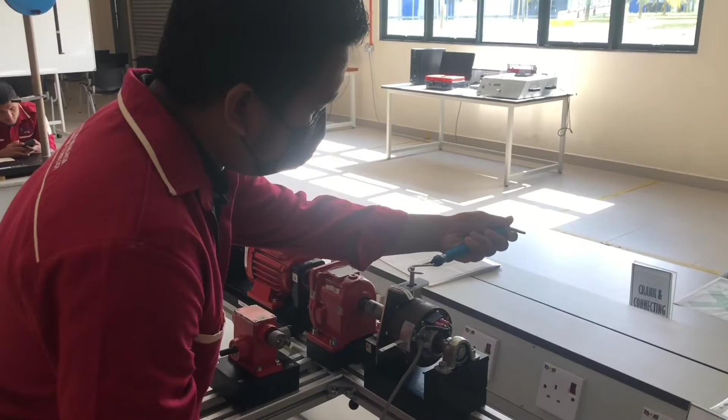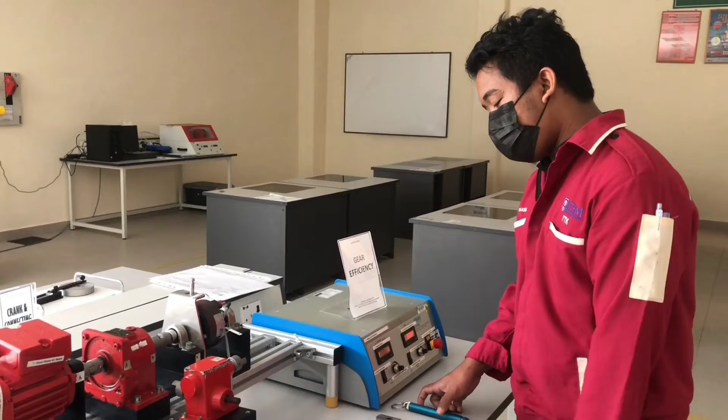Record the data in the table below. After we're done with the first task, we need to do the second task, which is to determine the efficiency of two-stage spur gear.

The setup will be the same as the first task. We need to set the motor speed and the excitation current. The motor speed is 1520 RPM and the current is 0.32. We need to set the speed first, 1520.

After that, we need to do the same thing as task 1, which is balance this motor using this lever arm.

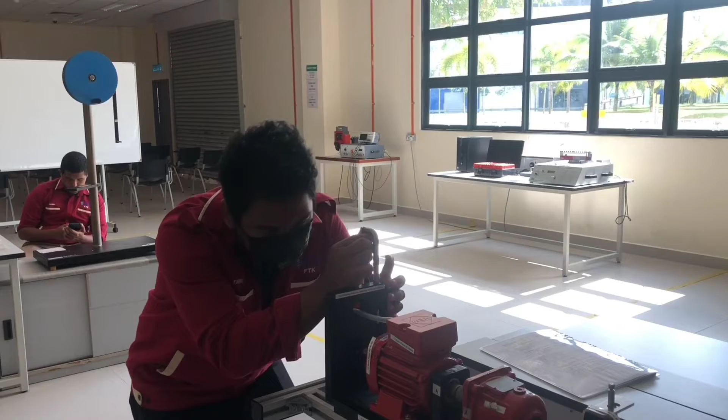Then we need to take this reading scale, which is 60.25, and then multiply with 25 Newton. That is for the force one.

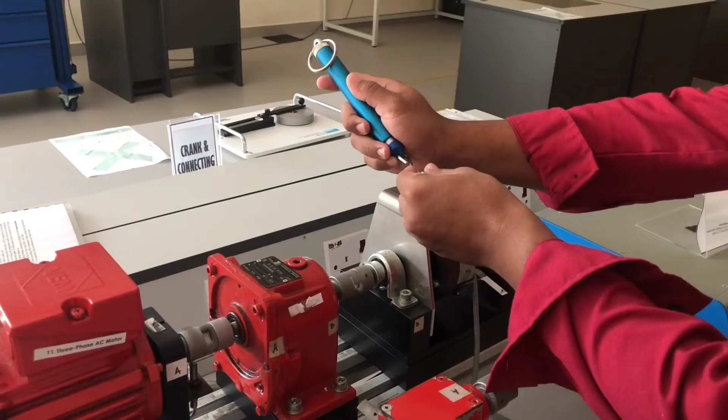We need to use this to take the second force value, which is force 2. We need to pull it and take the reading for the output force.

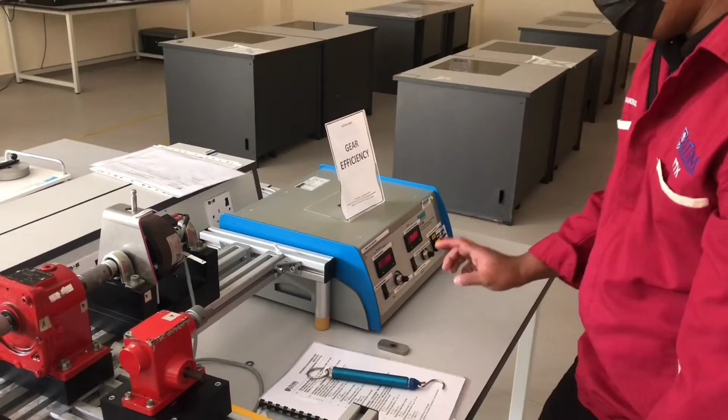After we're done with the experiment, we need to switch off all the current.

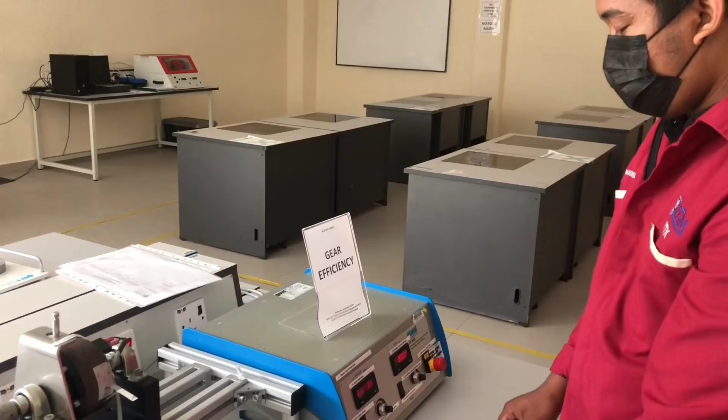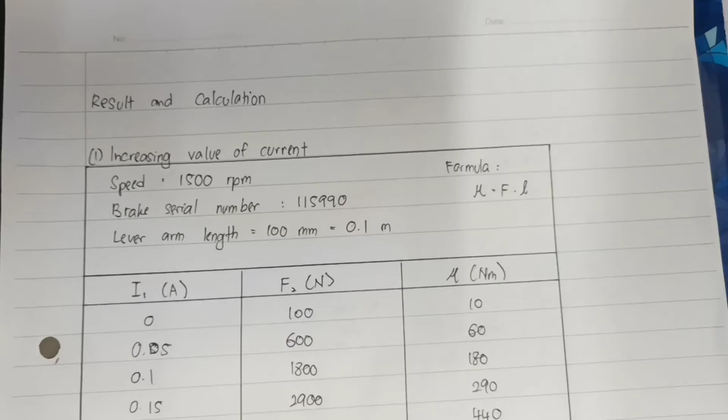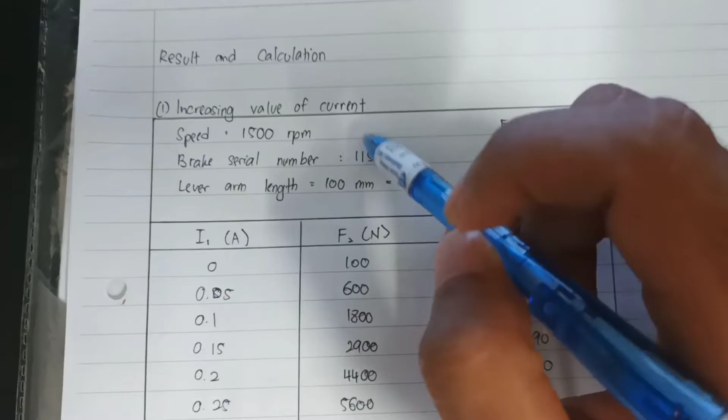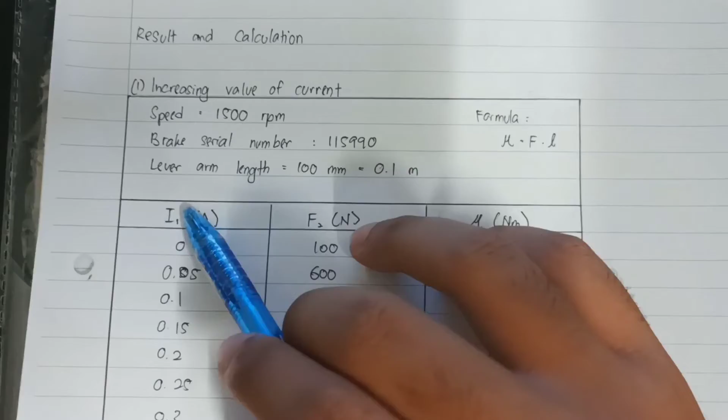For the result, we have two results: first the increasing value of current, and second the decreasing value of current. For the increasing value of current, we're going to use speed equal to 1500 RPM, brake serial number 115990, and lever arm length equal to 100 millimeter, equal to 0.1 meter.

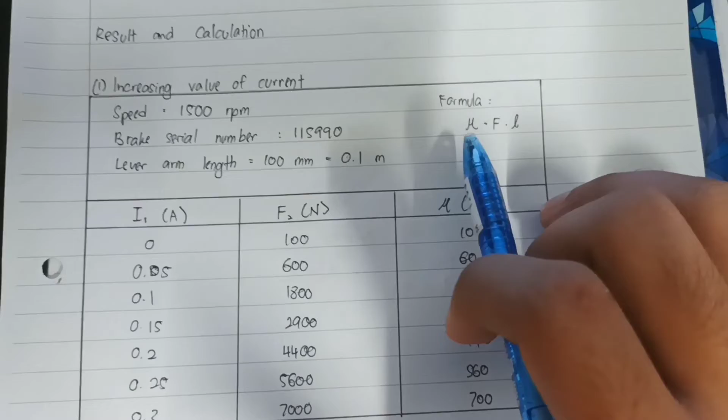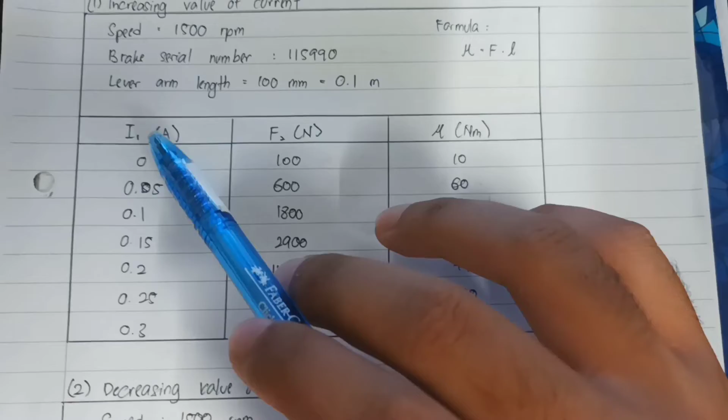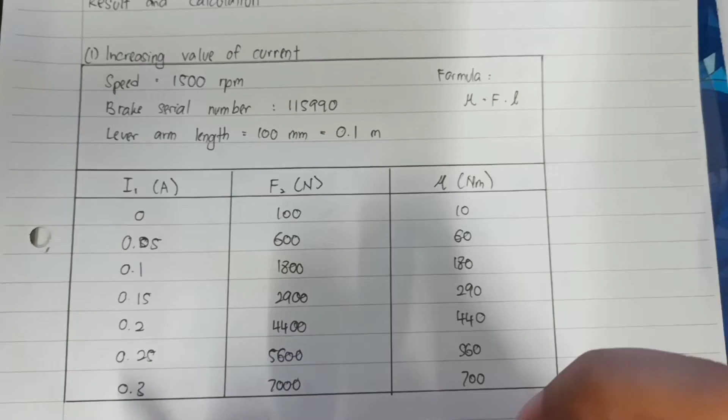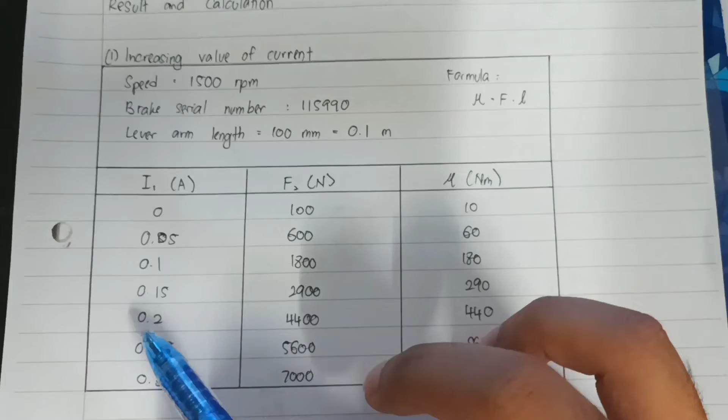The formula we're going to use is torque equal to force multiplied with length. So on the table we have current, force and torque. For current, we're going to use increasing value, from 0 to 0.3: 0, 0.05, 0.1, 0.15, 0.2, 0.25, and 0.3.

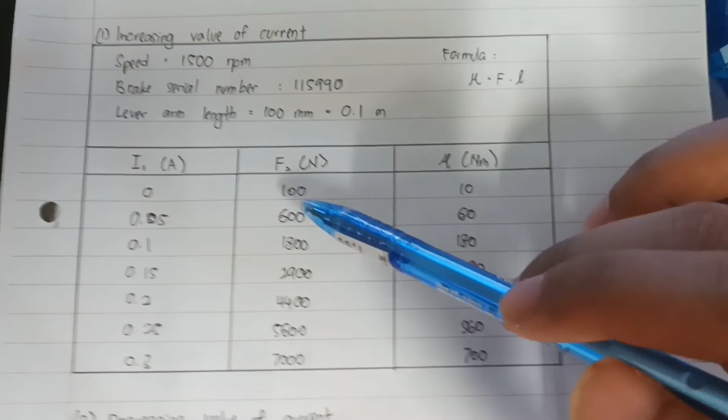Based on the experiment, the force that we get for the first value is 100, followed by 600, 1800, 2900, 4400, 5600, and lastly 7000.

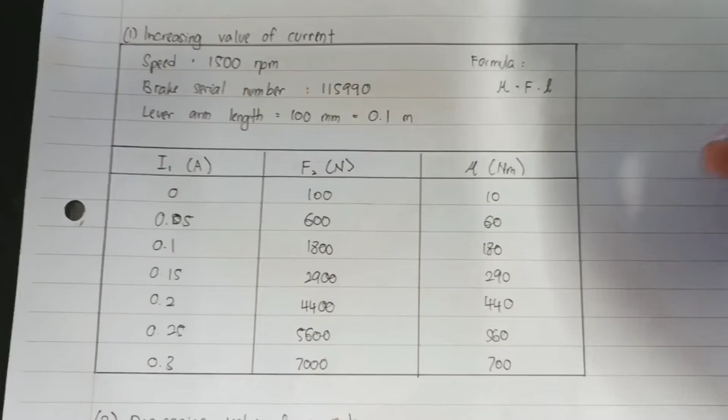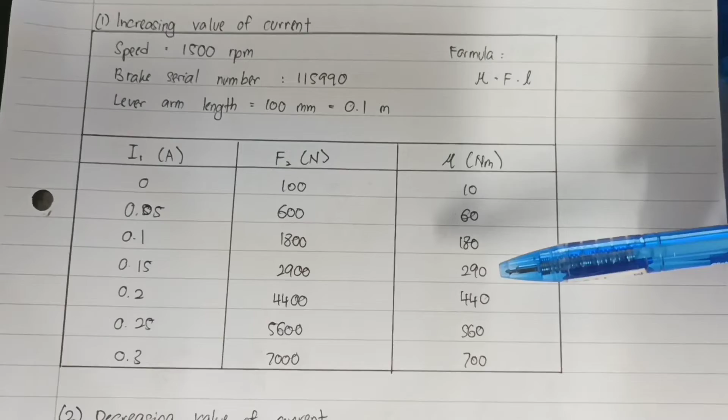Based on the calculation using the formula, the value of torque that we get for the first one is 10, followed by 60, followed by 180, followed by 290, followed by 440, followed by 560, and lastly 700.

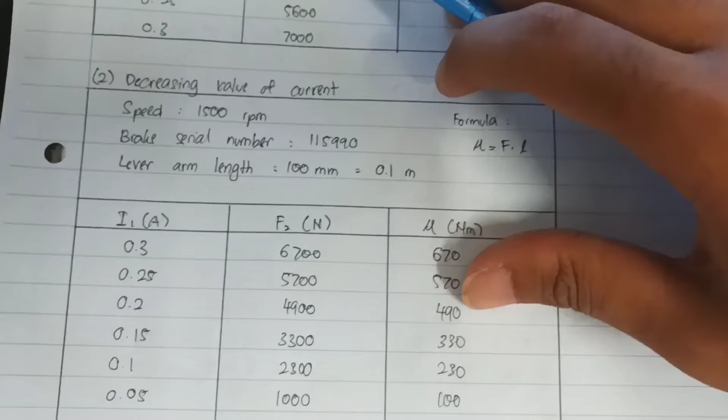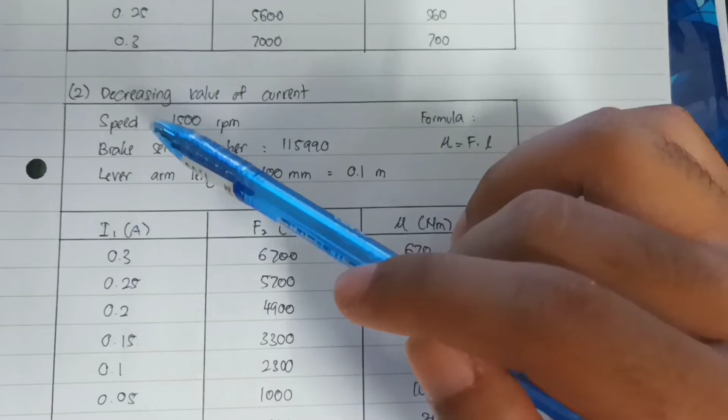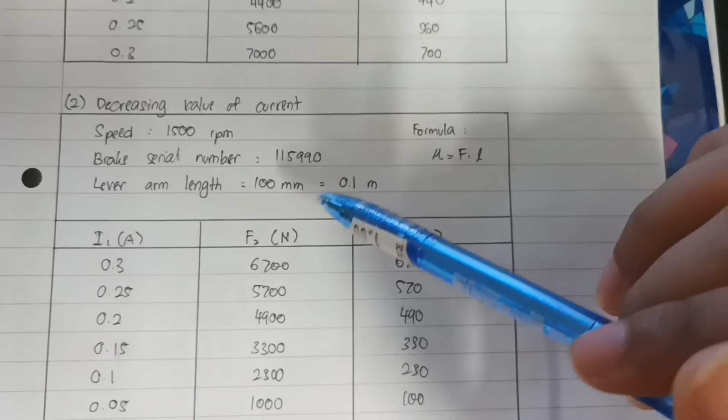For the decreasing value of current, we're going to use almost the same data: speed equal to 1500 RPM, brake serial number equal to 115990, and lever arm length equal to 100 mm, equal to 0.1 meter, and the formula still using torque equal to force multiplied with length.

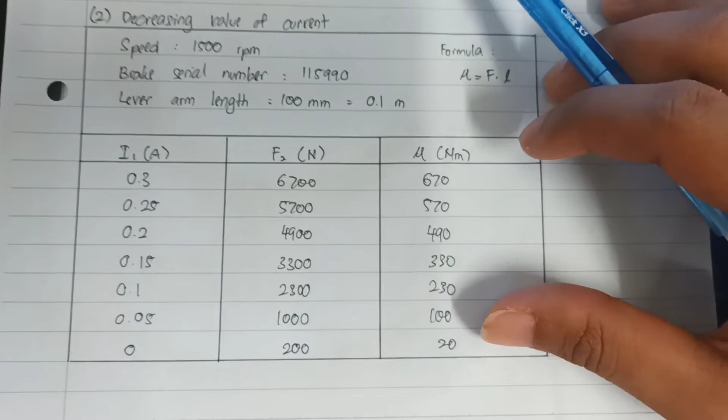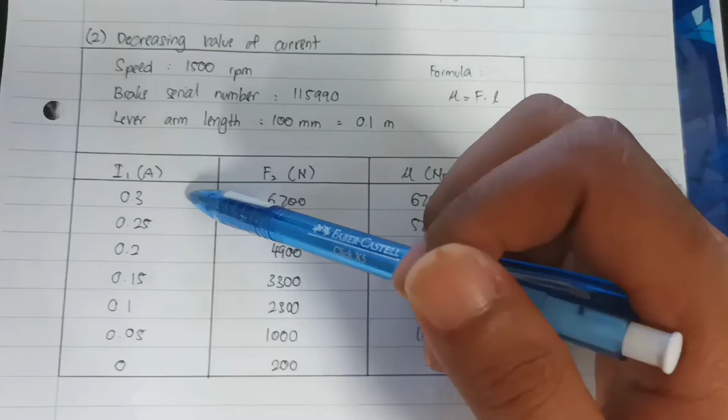For this experiment, we also have value of current, force, and torque, but in this table we're going to have a decreasing value of current, starting from 0.3 to 0.25 to 0.2 to 0.15 to 0.1 to 0.05, and lastly 0.

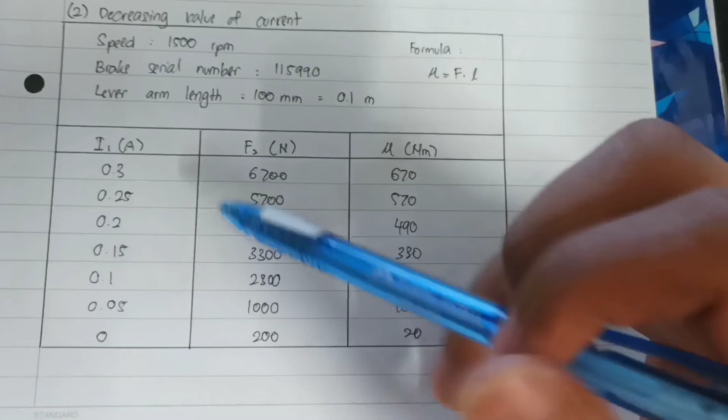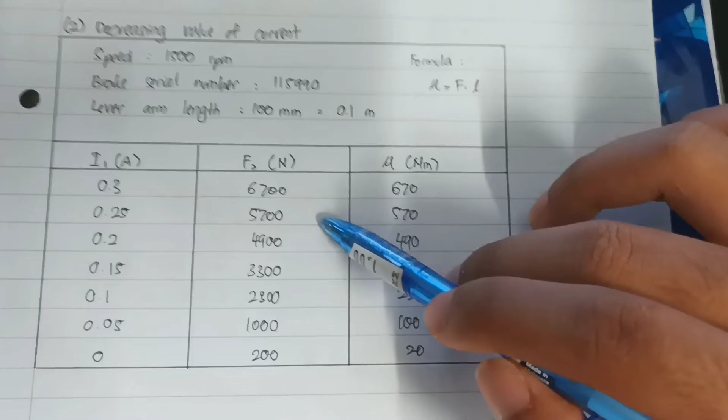Based on the experiment, the value of F that we get is 6,700, followed by 5,700, followed by 4,900, 3,300, 2,300, 1,000, and lastly 200.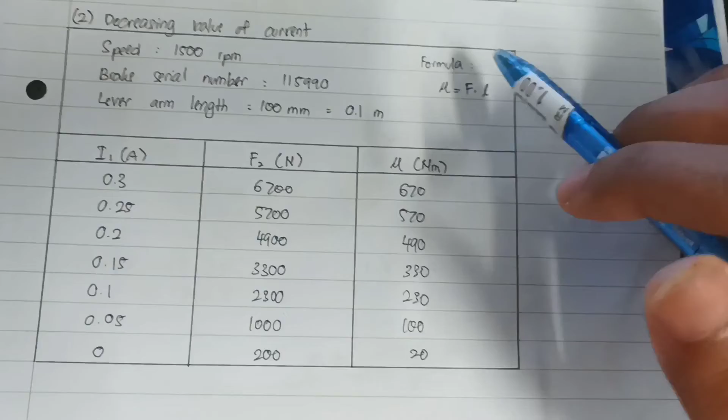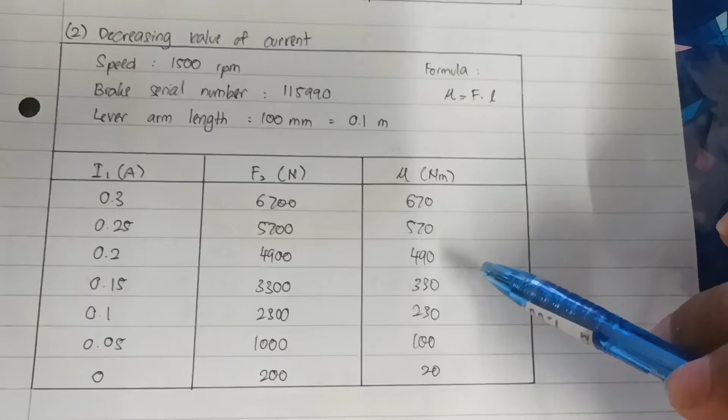Based on the calculation using this formula, the value of torque that we get first is 670, followed by 570, followed by 490, 330, 230, 100, and lastly 20.

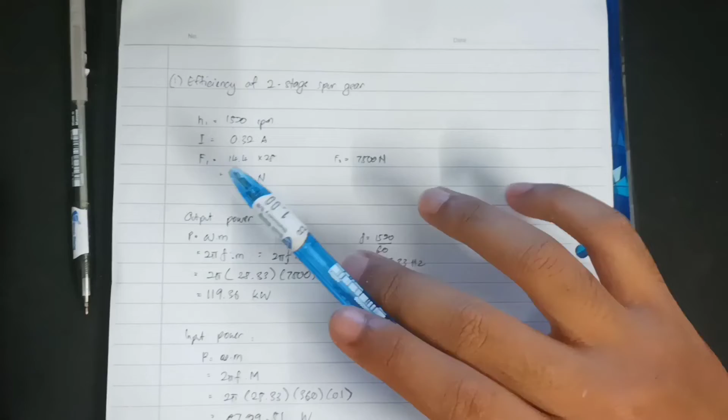Then we continue to the part calculation, where we have two calculations: first, efficiency of 2-stage spur gear, and next, efficiency of worm gear.

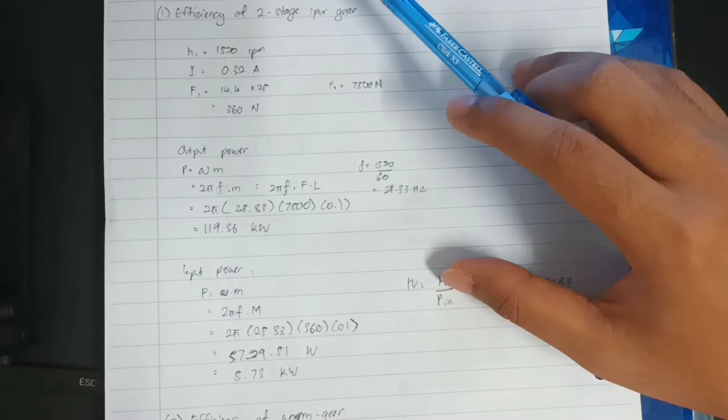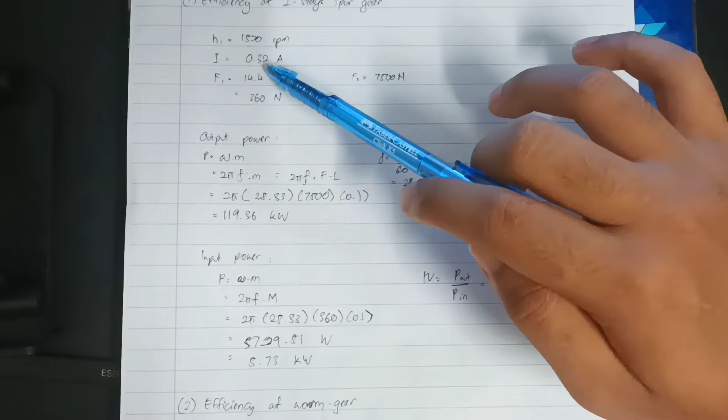For the first calculation, efficiency of 2-stage spur gear, the data that we're going to use is speed equal to 1520 RPM, current equal to 0.32 A, force 1 which is 360 Newton, and force 2 which is 7500 Newton.

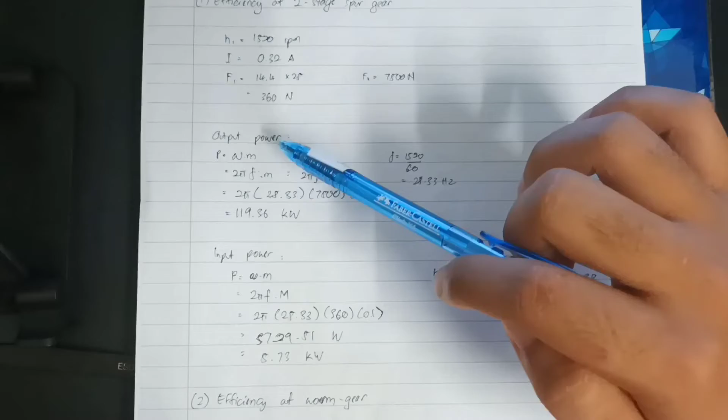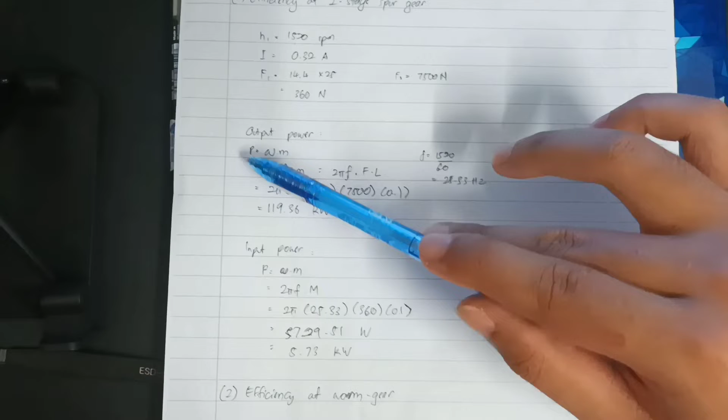We're going to find output power and input power before we get the efficiency. The formula we're going to use is power equal to omega m, which is equal to 2 pi f multiplied with m.

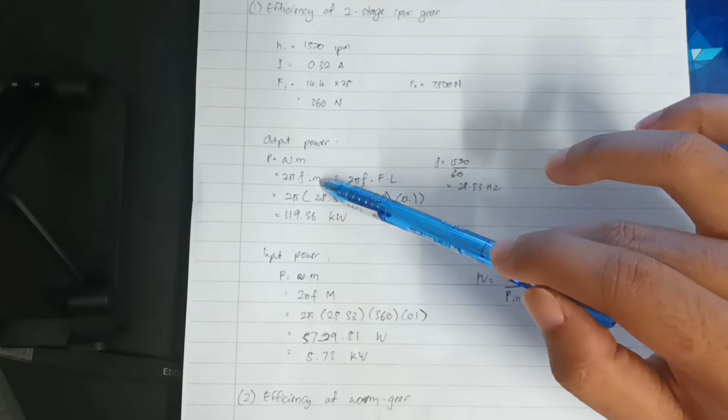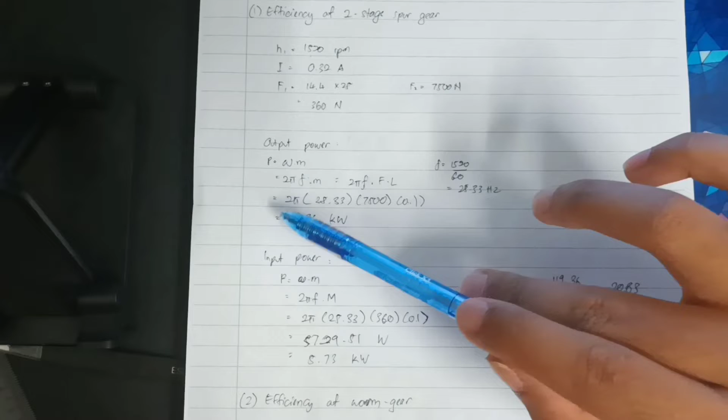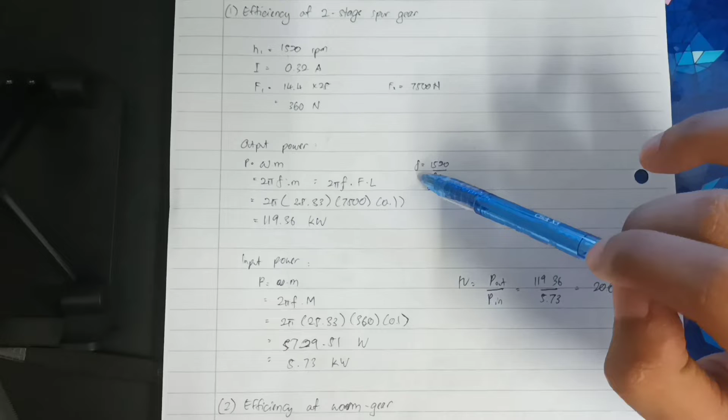When we inserted the value, it's going to be 2 pi multiplied with 25.33 multiplied with 7,500 multiplied with 0.1, we get 119.36 kilowatt. The value of F, which is 25.33, we get from F equal to 1,520 divide with 60, which gives us 25.33 hertz.

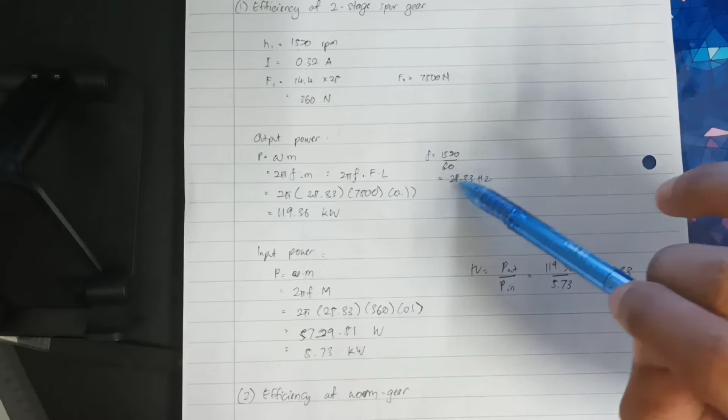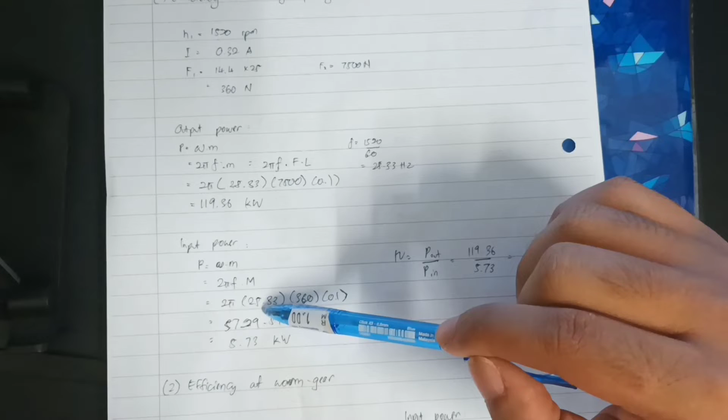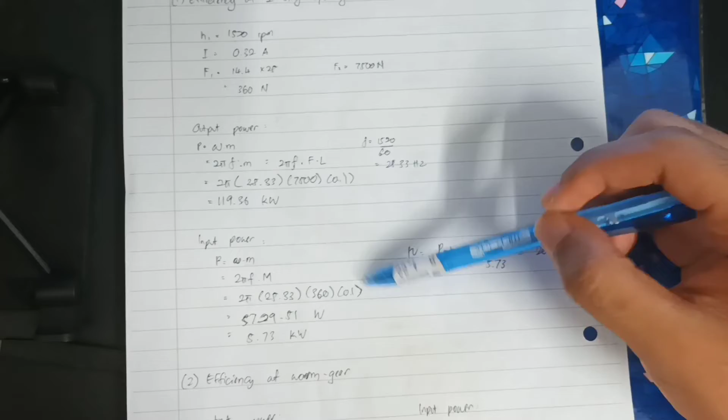Next, for the input power, we're going to use the same formula, and when we inserted the value, we get 2 pi multiplied with 25.33 multiplied with 360 multiplied with 0.1, giving us 5,729.51 watt. We change it into kilowatt, which is 5.73 kilowatt.

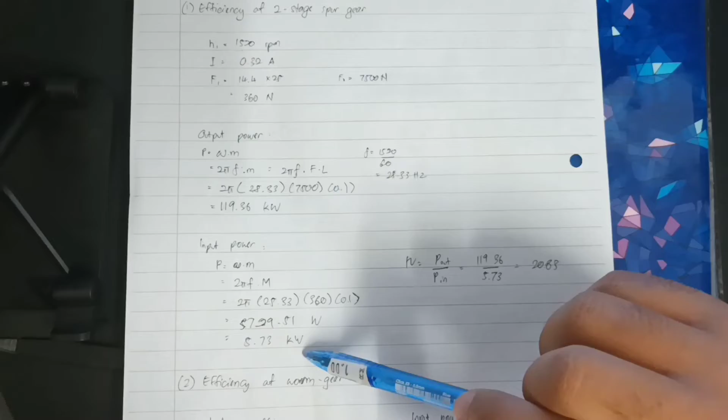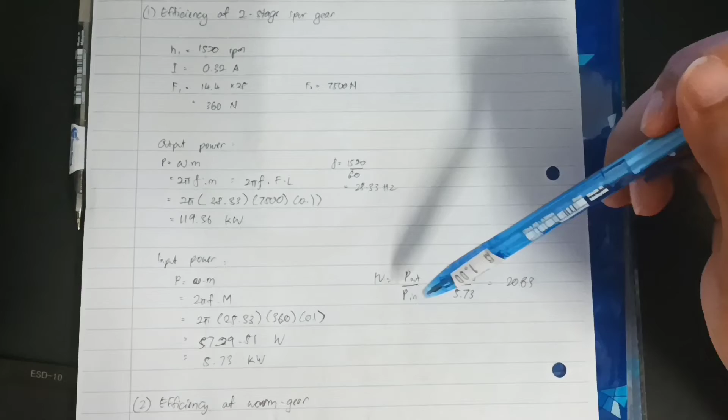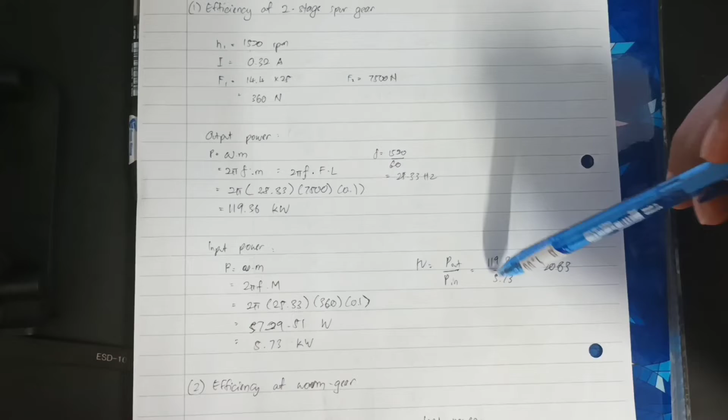We enter the value of output power and input power into the formula: efficiency equal to output power divide with input power, equal to 119.36 divide with 5.73, which gives us 20.83.

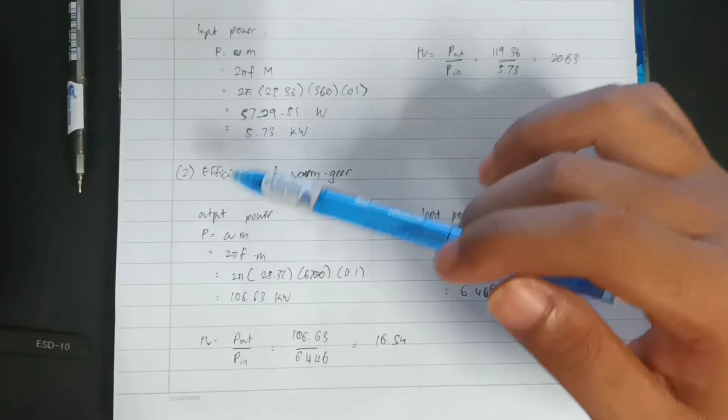While the calculation for efficiency of worm gear is the same as the 2 stages spur gear, we're going to find out output power and input power before we insert it into this formula.

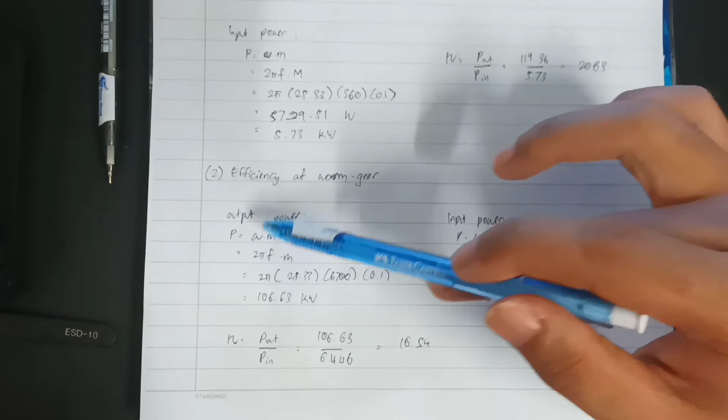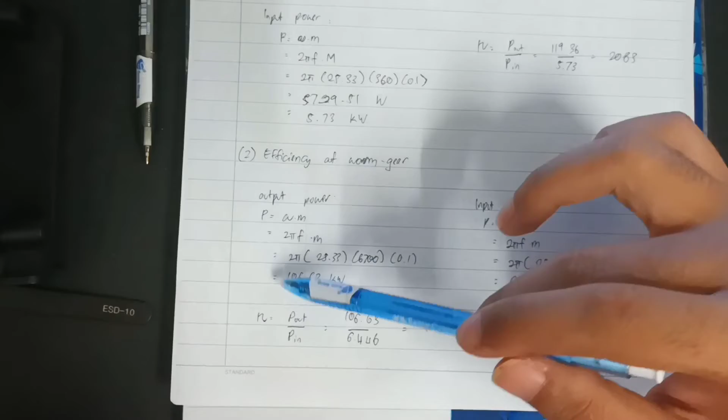For output power, we're going to use P equal to omega m, which is equal to 2 pi f multiplied with m. When we insert the values, it's 2 pi multiplied with 25.33, multiplied with 6,700, multiplied with 0.1, we're going to get 106.63 kilowatt.

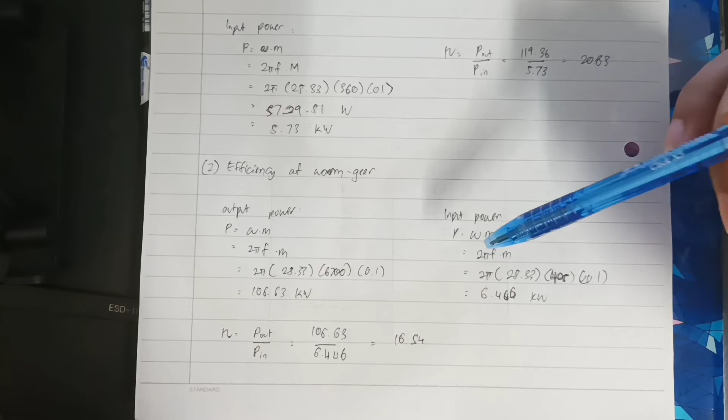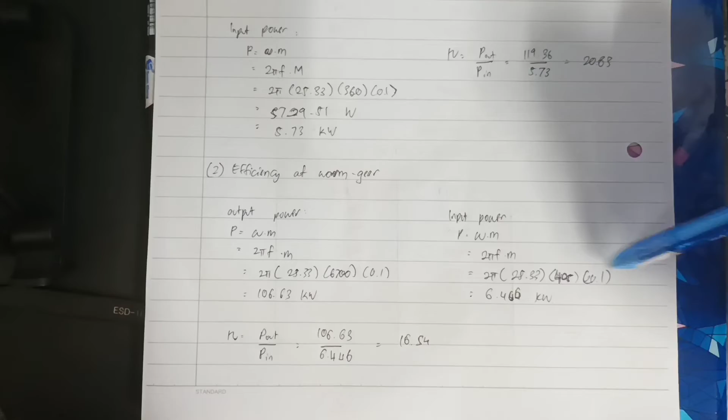And for input power, we're going to use the same formula, which when we insert the values is going to be 2 pi multiplied with 25.33, multiplied with 405, multiplied with 0.1, we're going to get the value 6.446 kilowatt.

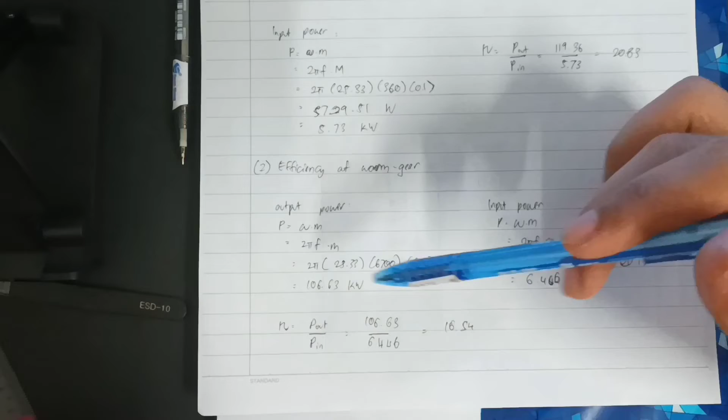And then we're going to enter both output power and input power values into this formula, which will be 106.63 divided with 6.446, and we're going to get the efficiency equal to 16.54.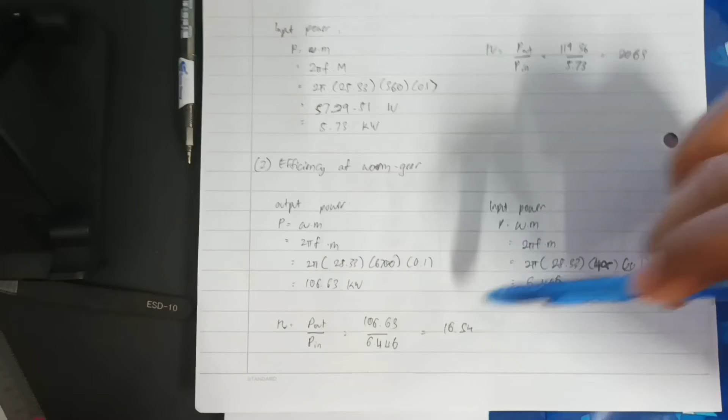Okay, after the results and the calculations, I'm going to continue with the observations, discussion, and also the conclusion.

For the observation, experimental evidence shows that the mechanical efficiency of gear is sensitive to current within a limited range. This efficiency increases and decreases with the value of current. The experimental data and the calculated data show a statistically significant relationship, confirming the hypothesis tested in this experiment.

It has been demonstrated that when the value of current increases, the force on the lever arm and the output torque increase proportionally. Otherwise, if the value of current reduces, so does the force on the lever arm and the output torque produced.

Based on the experiment, there are two transmission units in total: a spur gear with a ratio of 1 to 13.5, and a single stage worm gear. The spur gear must be mounted in a straight, extended configuration, but the worm gear must be mounted in an oblique configuration. Experiments are conducted to record the brake characteristic in order to aid the modification of the brake torque, with the lever arm used to measure the force.